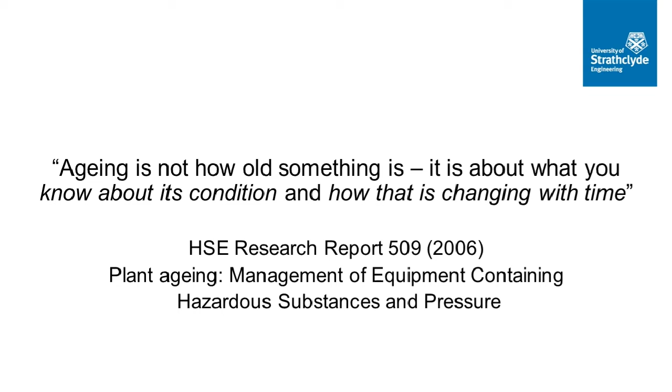It's not how old something is, it's about its condition, and also how that condition is changing with time. There's a dynamic element in it, as well as where you are at this moment. When we talk about aging, it's really relating to the condition of the equipment and any damage, degradation, or defects it may have sustained.

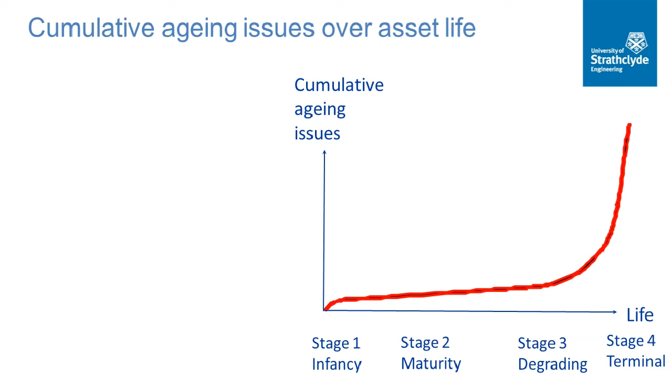So this graph here is the bathtub curve, except I've plotted it in a cumulative way. One of the things that 509 introduced was this way of looking at plant life in 4 stages. It divides aging into 4 stages. Stage 1 is when equipment has just entered service, where there can be some early operational issues - design and manufacturing faults, commissioning faults, first startup kind of issues where maybe flanges are leaking, maybe things haven't quite been optimized. But after a while these things are corrected, and there's then a fairly long stage of what we call maturity, where the equipment is behaving as expected.

There's minimal amounts of degradation. It has high reliability and availability. During this time, any inspections that are done are largely confirmatory of the design assumptions, and there can be quite long intervals between them.

By stage 3 - and there's no scale on this life scale, I don't know when stage 3 kicks in, it's something particular to each piece of equipment and plant - we start to see aging issues accelerate, both in number and severity. I'm having my ensuite refitted at the moment, and it's after 20 years, and it's amazing what there is to find when we've taken it apart. You really don't want to know about it.

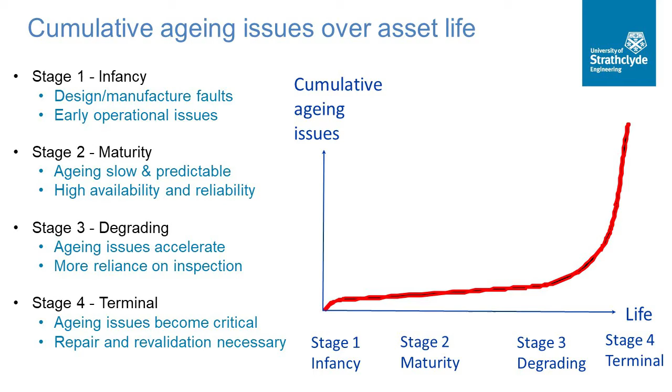At this stage, there needs to be rather more emphasis on inspection and actually measuring and quantifying how much degradation has taken place. So there's quite a rapid change there. The final stage is where these issues become critical. The leak at the bottom between my shower tray and the tiles became unacceptable, and I was forced to do something - I couldn't patch it up anymore, and in the end it needed a completely new refit. So that was an example of the issues over life.

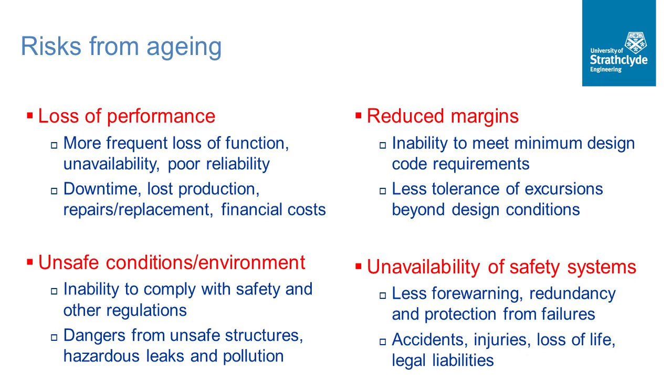We know what the risks are from aging - I don't really need to go through this in any great detail. There's loss of performance, unsafe conditions and environment, inability to comply with safety and other regulations, reduced margins, and unavailability of safety systems. At worst, we've seen the kind of incidents that we saw at the beginning. So there are obviously risks and consequences from aging in relation to performance, safety, the resilience of the plant to tolerate other events and excursions, and dangers from leaks and pollution, and worse.

So what's to be done? Well - risk-based inspection.

I recall this has been around for over 30 years now, for most of my career. I've given a definition: the planning of inspection frequency, coverage, method, and qualification relating to how it is applied, based on a risk analysis of likelihood and consequences of foreseen threats to integrity. It's a fairly general definition, but the key words there are risk analysis and foreseen threats.

You do your very best in a risk analysis to see all the possibilities, but no matter how good you are, there are always events and things that happen that are off your radar. I don't think we should forget that the incredible often happens, or occasionally happens, perhaps not often.

Because the practice has evolved over 30 years following the Health and Safety at Work Act, the Pressure Systems Safety Regulations came in 2000, COMAH and other regulations, and this shifted the responsibility very much onto the shoulders of the duty holders and the competent persons that support them, and it enabled duty holders to change from time-based inspections to a more informed, data-driven process.

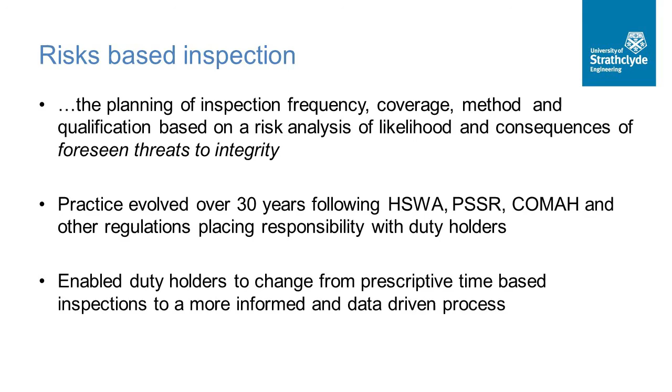So that was risk-based inspection. Now, risk-based inspection has both benefits and limitations.

On the plus side, I think everybody would agree that the greater analysis, the risk analysis, has enabled run times to be extended, particularly in the early and mid stages, those stage 1, stage 2, particularly stage 2 of equipment life. And this has given greater confidence in the plant condition and rate of aging.

There's been increased understanding about the degradation mechanisms, and with that, a reduction in the need to open and enter vessels for invasive inspections. There's what's called clean, non-corrosive service, which when it can be justified, enables a non-invasive approach. But there are also some negatives from it, and I think we should bear these in mind as well.

It's expensive to set up, and it's quite manpower intensive. It's highly dependent on the amount of information that you know about the process conditions, the product, the operating cycles. There's a high reliance on that risk analysis and the data and the reliability of that data.

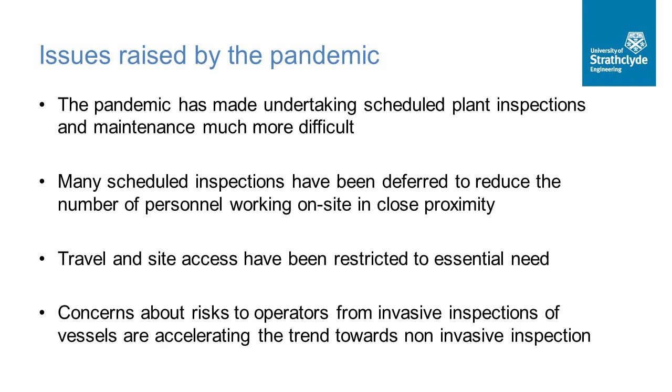And then there are concerns about the risks to operators from invasive inspection, being inside a tank or a vessel in a very confined atmosphere. I think this has been felt to be undesirable during this time of pandemic, and it's accelerated the trend towards non-invasive inspection.

You've got to ask yourself, well, what are the advantages? Why change from invasive inspections? What's wrong with them? There's quite a few advantages. They provide, opening equipment - you can get in there and actually see what's going on, direct visual access.

Inspection methods - you can apply magnetic particle testing to search for internal cracks, which you can't do from the outside, and it allows really accurate locating of where there may be defects or damage on the inside surface, because you're actually there. And I think there's no doubt about it, when you can see things directly, it does reduce uncertainty about those unforeseen damage mechanisms.

Now, there are some disadvantages from invasive inspections. Certainly they're expensive when you undertake them, expensive to prepare, and you have to take your plant down and empty it. There's confined space hazards - it's difficult and not nice work for operators.

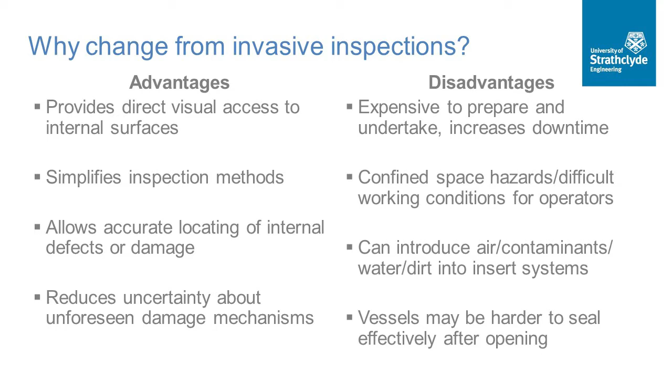There's some distortion that may well have taken place during service, which might make it more difficult to seal. So there are some significant disadvantages, and the increase in downtime and the confined space hazards are really the key ones.

In 2009, I was asked by the HSE, Pauline Hughes, to prepare a report on internal examination. Companies operating equipment with clean, non-corrosive service were claiming very long inspection intervals between opening them up, and the HSE said, well, was this all right?

The result of this was HSE Research Report 729, and you can still get it on the HSE website. It was based on practice and interviews with leading companies. We visited two ethylene manufacturers, one pharmaceuticals manufacturer, and three refineries. We also talked to competent person organisations, IMechE, and the HSE themselves to get their views.

This report examines when intervals between internal examinations, that's invasive examinations, can be extended for vessels. And the key words there are clean, non-corrosive products. Within it, there's a process for establishing when non-invasive inspections can be justified and when internal examinations may be required.

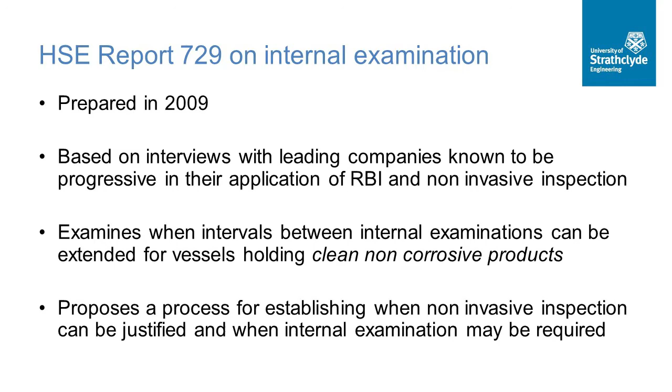I threw this one in because it's always helpful to remind ourselves, when we open a vessel or when we're doing our risk-based inspection, what are the main causes of internal defects and damage we really need to have in mind. The first one is internal corrosion, whether it's wall thinning or pits. It could be hydrogen damage as a result of corrosion.

It may all depend on the combination of the product with the vessel or tank material or any lining. It can result from level changes, and it may not be the product itself, but some contaminants within it, or ingress of water or oxygen, or a mixture of both, or the space above the product that causes this.

Breakdown of protective coatings - many vessels are internally lined, and that is a key aspect of their integrity. Internal fixtures and things might have become loose as a result of vibration.

I've met situations where fluid impingement from jets coming into vessels through nozzles has resulted in wall thinning on the far wall, where the fluid hits the wall and erodes the material. Fatigue cracking from the roots of seam welds.

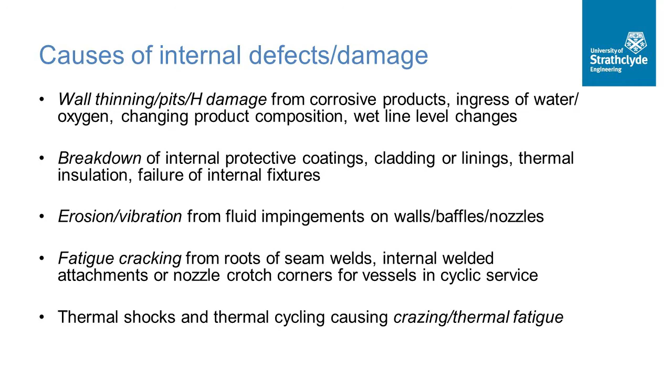The report asks the user to think about these questions in order to justify extending intervals between invasive inspections or reverting to non-invasive inspection. First of all, is there strong evidence - using that phrase, strong evidence - to demonstrate no active internal degradation, particularly for vessels holding clean and non-corrosive products?

I think the whole thing turns around the extent of the evidence that can be put forward from technical knowledge and other things. Does a non-invasive inspection provide an equal level of confidence to that which is invasive? Would it be disproportionate to open the vessel and enter it under ALARP?

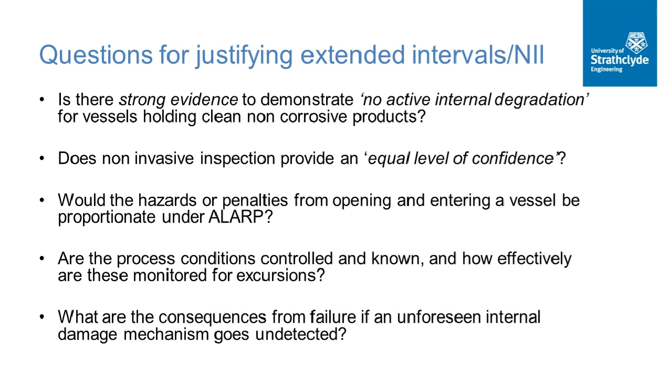How well are the process conditions known and controlled? Do you actually know what is inside your vessel at all times? And finally, what are the consequences if an unforeseen internal degradation mechanism goes undetected? So those are the five challenge questions that we recommended users should ask themselves.

So what is good evidence? First of all, evidence from the original design, manufacturing, and fabrication. What was the quality of the original vessel? Has there been any damage detected in any previous examinations - maybe some remote visual examinations using endoscopes, or vessels in equivalent service that have been examined after removal?

Technical analysis, understanding of the chemistry, and the elimination of corrosion, the elimination of significant fatigue. Having controlled and stable operating conditions, monitoring of cycles - is there sufficient confidence as to what the process conditions are, the temperatures and so on?

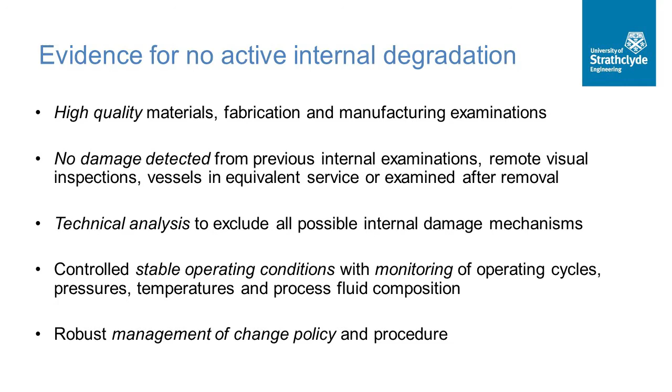And finally, lots of things go wrong when there is change, and I think a robust management of change policy and procedure is also probably a requisite for moving away from internal examinations. So this is the kind of evidence that the report recommends.

There will, of course, be times when it will be necessary to open equipment up - when you haven't got sufficient evidence, when it's weak or there is significant uncertainty from non-invasive methods, particularly if there's some indication from the outside surface of something going on inside, where there's been significant modification or an excursion outside the original specified design pressure or process conditions. Maybe something's got into the process fluid.

Of course, vessels are opened up for other reasons, to change catalysts, new linings and things. And on these occasions, it's appropriate to actually go and have a look, do some internal inspection.

And finally, there's a category of vessels, particularly in the nuclear industry, where the consequences of failure are so high that the very low probability of unforeseen threats becomes relevant. I think you'll find in the nuclear industry, certainly amongst the nuclear regulators, there is a fair bit of resistance against relying entirely on non-invasive inspections.

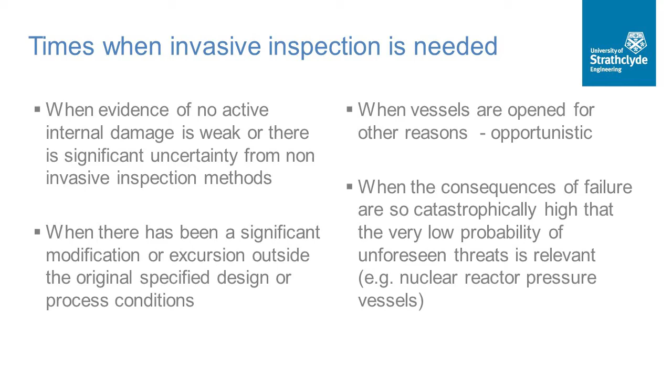So I'm going to finish in a moment. Next slide, please, Emma.

So this pandemic, I think it's been a challenge, but it's also, I feel, an opportunity - an opportunity for making changes to the way we do things that will ultimately be beneficial. Any moves towards non-invasive inspections and to replace invasive ones, providing they can be justified in the way I've just described, could well be a benefit that we can take with us into the future.

But there are a number of questions that I'm looking to David Burgess, who's speaking after me, to try and answer. How can non-invasive inspections provide an equal level of confidence, particularly if they're used repeatedly and over the longer term? Do we have enough confidence in the methods that are available, and what new methods are coming online?

So I think the answer is technology. How can more sophisticated online plant data about the conditions and the loading cycles be obtained, and how would these be used for inspection planning?

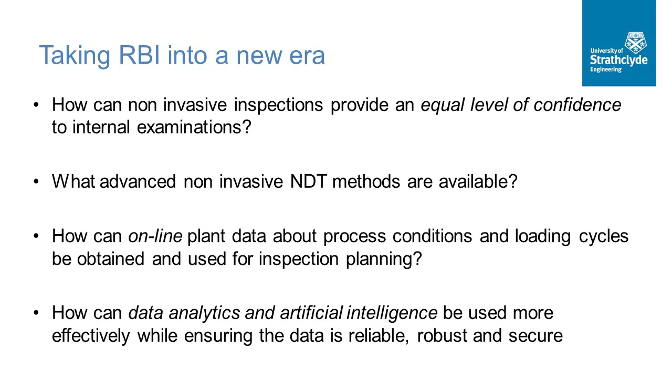So next slide, please. And I've reached my conclusion. With this introduction, I'd like to say that RBI is routinely used now for managing the risks from aging, but the pandemic is prompting companies to defer internal examinations. I think we'll come back to that - that's my reading of the tea leaves, but we'll come back to the poll in a moment.

The trend towards extending run lengths is between internal examinations and using non-invasive inspection. It needs to be backed by strong evidence of no active degradation. And we've got to ask ourselves, is my evidence strong enough to justify this? What are all the factors under those headings that I showed earlier?

And finally, I think the use of technology in terms of non-invasive NDT technology, plant monitoring methods, and technology for analyzing databases will in future provide an opportunity for better decisions to manage the risk and to lower the costs.

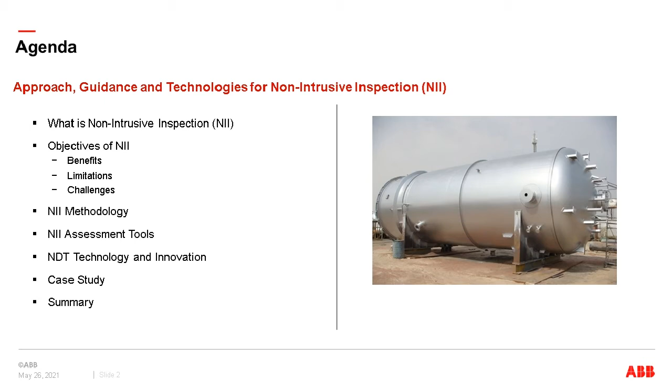Okay, so what is NII? Well, John touched on it really. We have high hazard bits of kit on our sites, stored pressure energy, quite often flammable, corrosive hazards inside. And as a result, our UK regulations and other regulations around the world make it such that we have to undergo statutory periodic inspection, and quite often that does involve non-destructive testing as well. Historically that's been internal visual inspection, but as John mentioned, non-intrusive inspection has appeared over time, and methodology has developed, and quite significantly there's been later methodology recently in the last year or so, so it's a good time to talk about the latest methodology.

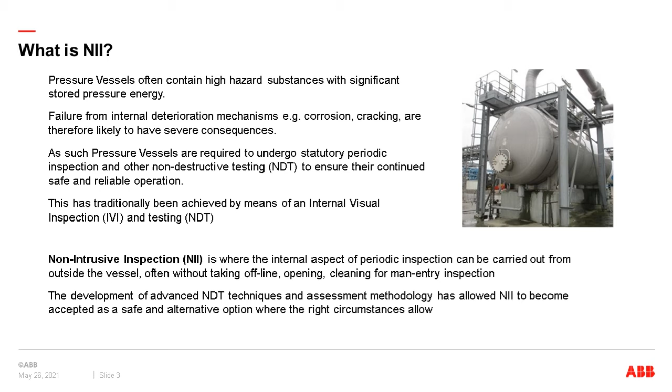Now, NII can be with the equipment online or offline, so it might mean that it needs to be offline because it's hot and difficult to approach, but you still might not need to go in it invasively. So that's the point there.

I think it's important first of all to understand why you want to do NII. What is your objective? And that can make a difference with your approach to the assessment and how you then approach the inspection. Some people might want to do it to save money, but really the main points of NII are certainly above that. It's about, if you've got equipment and you've got a large event and you want to understand the condition of equipment because you might anticipate repair, then it's useful to do that before the event so you can identify any repairs up front in anticipation for a shutdown. It might be that you have so many items in the shutdown that the shutdown would be unreasonably long, so you might choose suitable candidate vessels to do NII on, providing it's safe to do so.

It might be that you've got deferment, postponement of a vessel coming up. Again, you don't have enough information or confidence in postponing it for the period you might want to, so NII is quite a useful process to help support a postponement.

Another one might be to complement an internal inspection regime, so between the invasive inspections you'd like to do some NDT, and in a way that can be termed NII as well. And also, if you have upset conditions, maybe a pH excursion, that can also warrant you to say maybe not shut the plant down, but let's do some NII to see what the effect is of that excursion. Any of that, however, really should be defined such that the risk levels are not increased. This effectively means there should not be an increase in the probability of failure when you introduce NII.

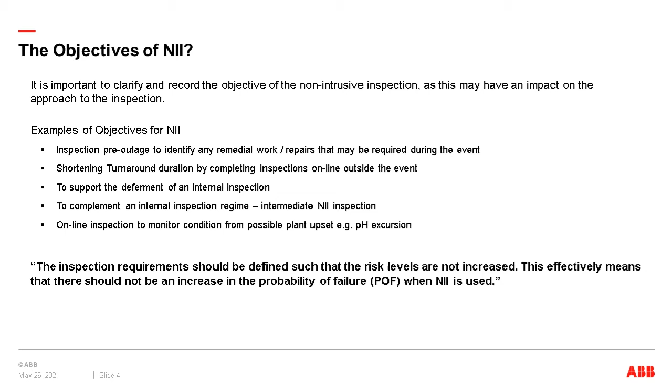Okay, so thinking about the benefits of NII, I touched on it before. There's an obvious one, cost saving - you don't have to open up, isolate, prepare, clean, and all of that. Obviously that will also give you increased plant uptime in not having to bring the plant off in certain circumstances. One other good reason that's cited is confined space entry, people going into vessels - the hierarchy of avoid and remove the risk. But you've got to balance that risk, making sure that if you're doing NII, you've not made the risk higher.

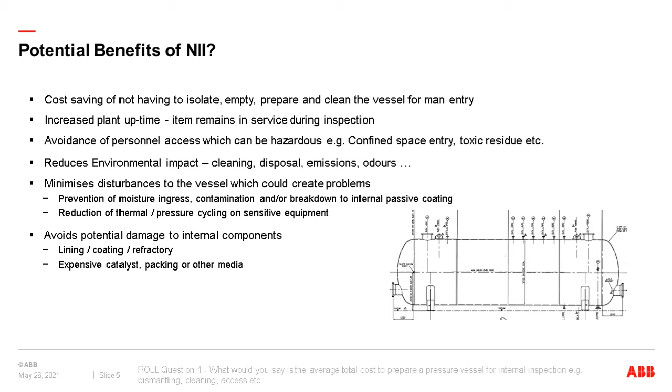You can reduce environmental impacts, the cleaning and disposal of emissions and odours - that can be an effect. But also some vessels might not benefit from disturbances, pressure, temperature cycles, so it might be advantageous to keep the equipment in service as much as possible to avoid any form of disturbance. And also it can avoid damage to internal components - you might have expensive catalysts in there, coating, refractory lining, so again that might be a benefit of NII. So there are plenty of benefits there.

Limitations. What would stop you doing NII? Well, if you don't understand the operating regime and there's potential for corrosion and deterioration, then you really shouldn't be going in that direction. If you don't understand the damage mechanisms, if they're unpredictable, again it's probably not a good idea to do NII.

If you have high degradation rates, high corrosion rates, again perhaps not a candidate for non-intrusive inspection. If you don't have sufficient inspection history or items of similar duty, then it's quite difficult to predict the damage mechanisms that are likely to occur and hence how you're going to monitor those. So again, maybe not a candidate.

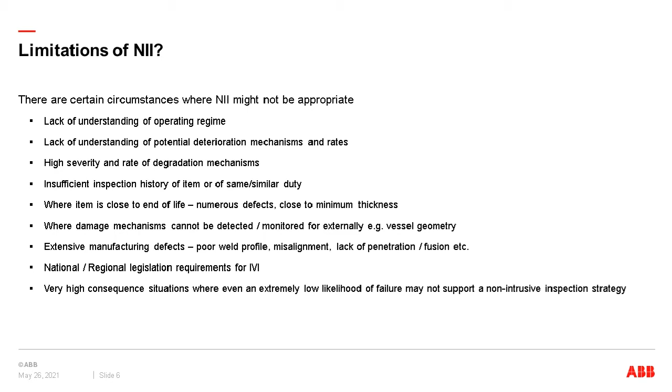Where the item is close to end of life, John talked about that in his asset life curve there, then again can be unpredictable, so maybe not a candidate there. And where damage mechanisms can't be detected, or maybe there's extensive defects, manufacturing defects, or the obvious ones like national regulations might not allow it in certain countries. And the final one, I think also very important, is where there's such a high consequence of failure, then maybe that's too much of a risk, so invasive inspection is the way you need to go.

There has been some reluctance to NII. Really, traditional culture was invasive inspection, and it has taken a while for people to accept and adopt that.

Some items are not suitable. It's very hard to inspect key aspects because of their certain design. Sometimes, quite often, you turn around and something's open for cleaning anyway. So if it's open for cleaning, then why wouldn't you do an invasive inspection? Or again, if you're not sure about the damage mechanisms, then you need to have some confidence in that.

It might be that there are some corporate rules within the organisation where they're not prepared to accept a potentially higher risk. So they might say, well, we don't want to adopt that. And sometimes, to support non-invasive inspection, it does involve quite a bit of technical assessment and NDT, and it might be that the cost of that outweighs the benefit of what you're looking for there.

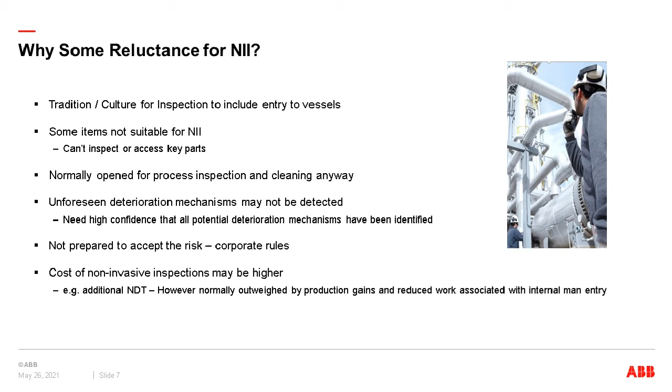So on to the methodology. The accepted methodology, certainly in the UK, but I think around the world, is this one originally introduced in 2007, DNV RP-G103. That's been developed over the years, and the latest version was introduced in 2020, and that now provides a more quantitative approach. It's a five-stage approach, and you can see the diagram on the right there for that.

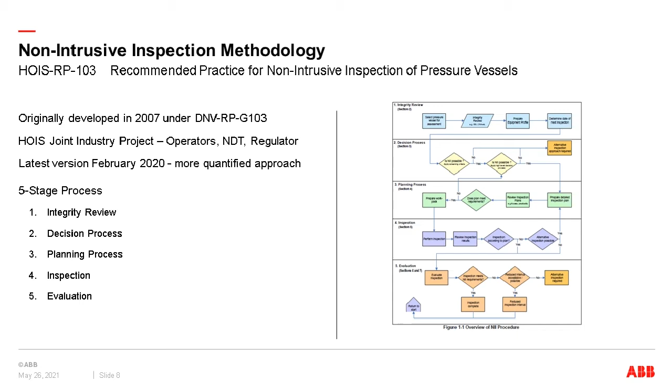It involves an integrity review, then your decision process, then a planning process, then actually doing the inspection, and then evaluating and assessing the inspection results on the back of that.

Looking at the integrity review, what you need to do is gather all the information about the equipment. What's its history? Has it got damage already? An RBI approach is quite good - if you've already got an RBI, that provides a lot of that information.

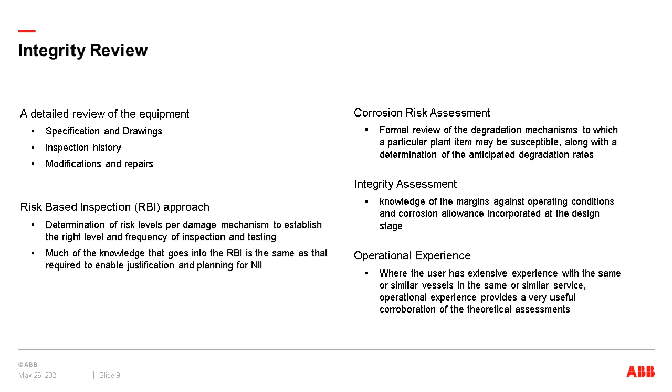The very important thing is to do the corrosion and risk assessment, identify the damage mechanisms, and then, of course, you need to understand its operational regime and its operational experience, such that you can understand what might be the damage mechanisms that are likely to occur. So that's your integrity review.

And then what you do is you go into this decision process, which is a two-stage process. The first part is screening, and you use the flow chart on the right to ask yourself the questions: is the vessel intrinsically suitable for non-invasive? That means if it's got damage mechanisms, you would want to use NDT to measure from the outside. And if the construction of the vessel won't allow that, then it's not intrinsically suitable.

Has the vessel previously been inspected before, and is that still relevant? Or is there any other equipment on the same duty you can take credit for? If you haven't got any of that, then it's very hard to make the case for an NII. Is there operating history relevant? Do you understand that, and is that reliable? And then finally, if entry is scheduled for another reason, then that might say, well, do the inspection anyway.

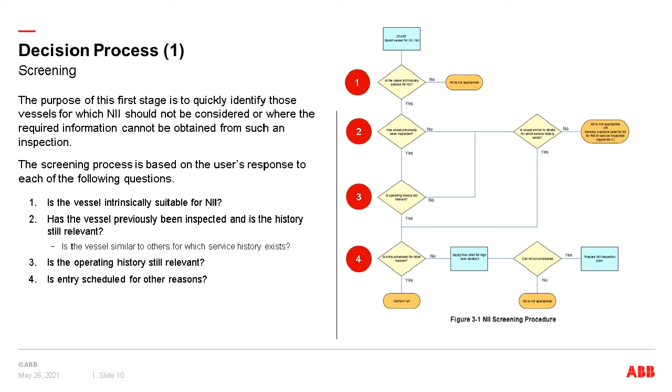So if after that assessment it's saying NII is acceptable, then you go on to this other decision flow chart that asks for three questions.

What is your confidence and ability to predict the type and locations of degradation? Because of course what you're going to be doing is an inspection from the outside, so you need to know what type of degradation to look for and where to look for it.

That's very important. Then, what was your previous inspection's effectiveness? When you've looked at it before, did you look thoroughly? Did you understand what the damage mechanisms were and where they were? If you didn't have a good, reliable inspection previously, that's going to make it difficult to justify the NII. And then the severity and rate of degradation.

If that's high, again that might affect the decision. But if all of those are acceptable against that chart, then it allows you to go forward and do an inspection plan for non-intrusive inspection.

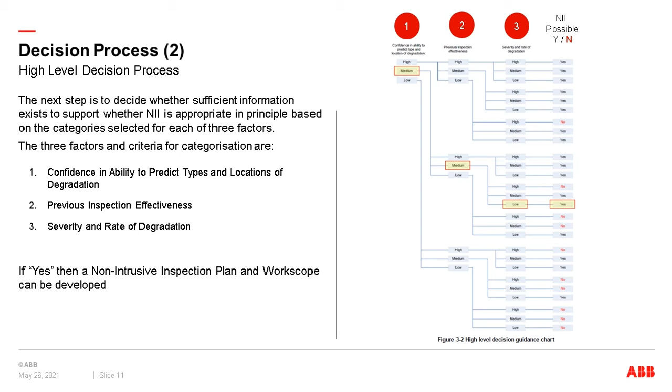That will be based on many things like the consequence of failure, the probability of detection, the confidence to predict the locations. Within the guide there are many tables that you put figures into, and that will essentially give you the locations and coverage required for the inspection.

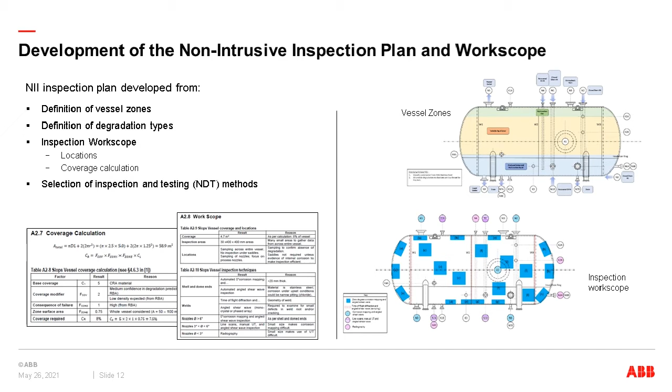And then you will select the inspection testing methods for that, again with the guidance within 103. So that's the assessment.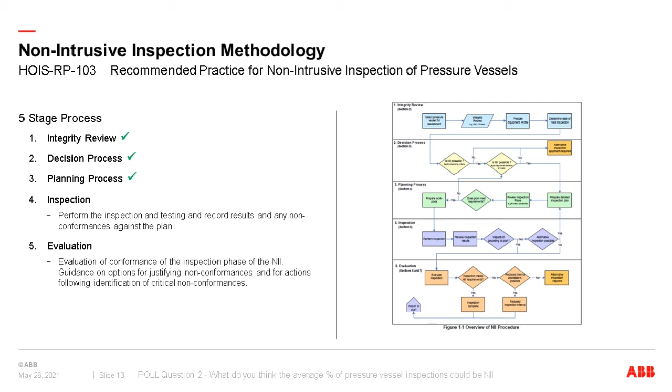So you've now got the assessment plan if it's okay for non-invasive inspection. The next bit, item 4, is to do the inspection and make sure that it's done as per the plan. Then after the inspection, evaluate the results, because it doesn't always go to plan. You might not get the coverage you want, you might not get the results that you expect. So there's that final part of the evaluation to say, well, have we got enough information to be acceptable? Okay, so that's in a way your methodology.

On to now some assessment tools.

Some organisations are now starting to offer software tools, quite good. There's a 3D model where you can actually display, it helps you visualise the corrosion zones and overlay the NDT results on it. You can see the image on the right, and it guides you through the assessment process. Look out for those if you want to use them, and it manages all the information. There's lots of data as well, which it helps you manage.

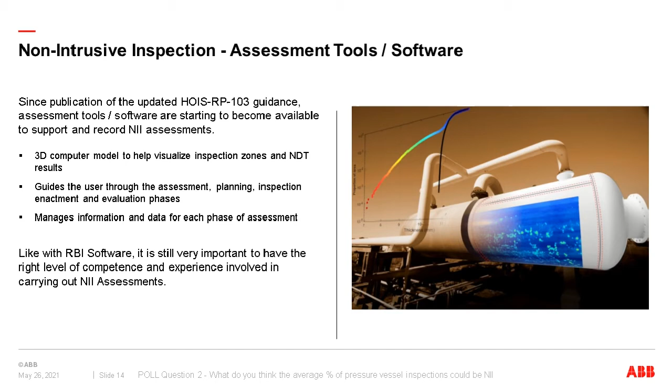But it's like RBI software, rubbish in, rubbish out. You do have to have competent and experienced people doing the assessments. It's not just about the software tool.

A slide here about challenges of adoption. Really, the point of this is that the latest methodology is relatively new. There has been non-invasive inspection informally before the methodology came, and it was utilised successfully.

When you do these assessments, that costs time and resource both in the assessment side of it and in the engagement of advanced NDT. So I think we do need to have an understanding of what the expectations are in terms of compliance with the new guidance, because it can be quite comprehensive.

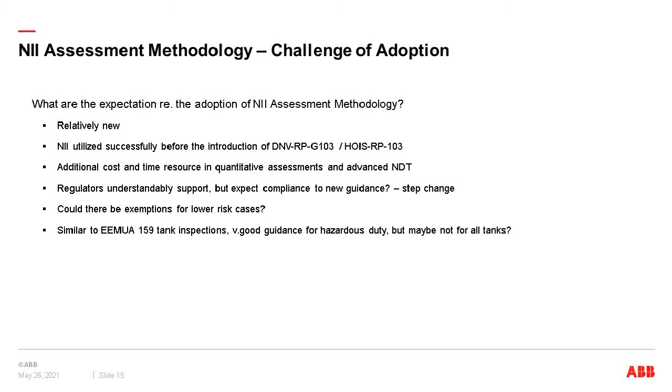It is a bit of a step change. Could there be exemptions for low risk cases? I see it a bit similar - some of you might remember EEMUA 159 tank inspections, very good guidance for hazardous duty and many tanks, but maybe not for all tanks. Is the latest methodology the same?

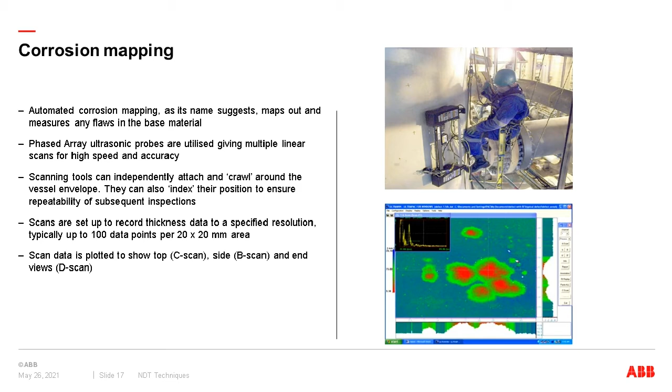This uses ultrasonics phased array, where it gives multiple scans, all automated on a carriage that you can attach to the item, and it will scan, detect and map the thickness and give it to you in a nice display. It's repeatable, so you can compare it with previous inspections. You can work out the corrosion rates and things like that. So corrosion mapping - very good, very reliable, and quite developed now.

Another one, if your equipment's hot, normal UT testing might be around 60-80 degrees as a maximum. But there is special equipment where you can use ultrasonic thickness testing for up to 350 degrees, with special couplant and special transport systems. Again, advancing technology is allowing that to take place.

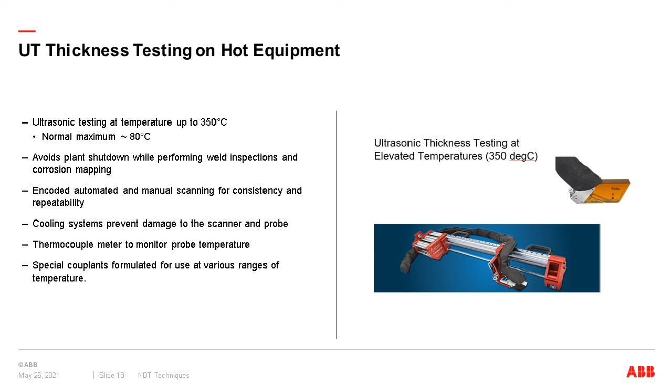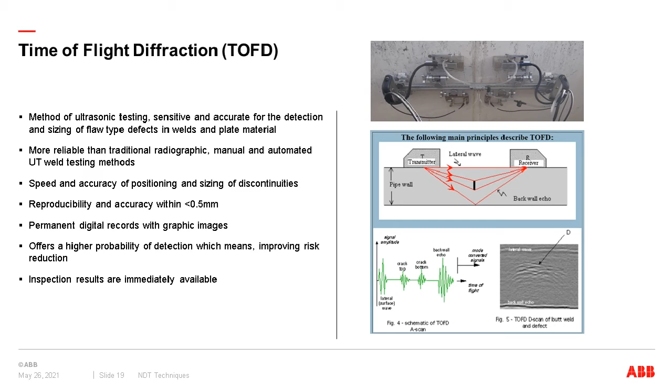Another one would be time of flight diffraction. Again, it's been around for a while now. This will measure thickness, but it's also very good for flaws, crack type defects. It's an ultrasonic method, like a pitch and catch method. You can see the image on the right where one transducer sends it and the other catches it. It's very accurate and reliable in terms of measuring defects. So again, a common one that you might use for non-invasive inspection.

Other digital inspection testing techniques include online monitoring, real-time corrosion and erosion monitoring, wireless UT thickness gauges, and more recently, robotic tank floor inspections. There was an IMechE webinar last week on that, which was very good. So technology is advancing and allowing these non-invasive inspections.

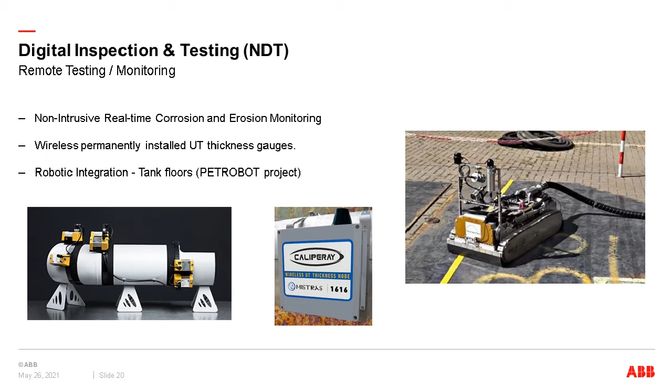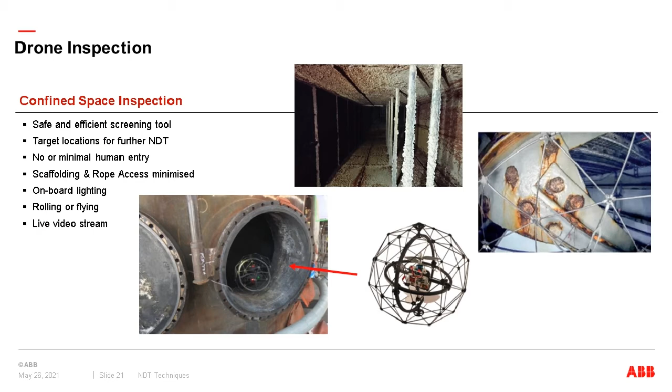And then drones, we've seen those. They're not quantitative, but they're quite good at being able to recognise where there is damage, which then helps you locate it, and you can then perhaps measure that from the outside if you think you can. So again, drones are quite good technology.

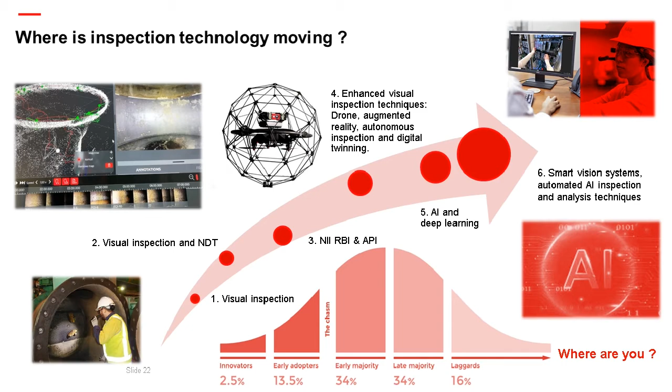Moving on, in terms of technology, it's a moving target. I think we're all seeing that now, it's advancing all the time. You can see there, item one was visual inspection, then inspection and testing, then we did RBI and NII, and now we're moving into these advanced techniques that are helping us give more reliable information. Like John said, these still have to be tested to make sure they are viable and reliable techniques. Like the ones we're seeing now in terms of phased array and time of flight, they take a while to get the confidence, but they develop and we do have the confidence in them ultimately.

A short case study here, with three types of cases: onshore refinery, offshore platforms, and onshore and offshore combined. You can see the percentage of items that might be suitable for NII - remember that screening we talked about earlier. It's surprising actually, once you go through the initial screening, you can get quite high percentages that could be candidates for NII. Some people believe that could be even larger as technology develops.

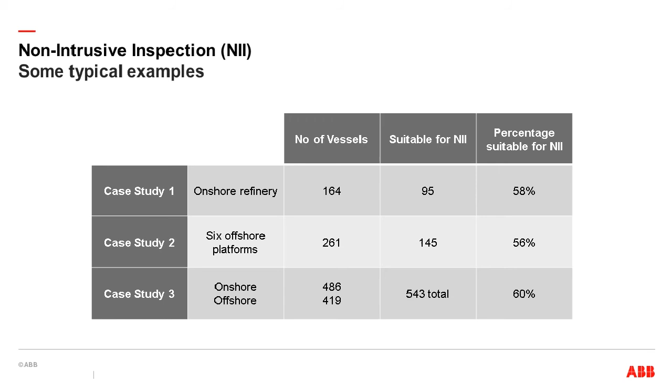So in summary, non-intrusive inspection is becoming increasingly the norm as advancing technology and methodology helps us determine that to be risk acceptable. They must be carried out, though, by competent and experienced people - it's not just about the software or the NDT, there does need to be an element of competence and experience there. In some cases it's just not possible, or not the right thing to do, due to the risk involved. Sometimes it's not possible because national rules and regulations in certain countries won't yet allow that.

Intrusive inspection will still be required if the NII criteria is not met, and I would say for very, very high consequences, you do need an element of invasive inspection to support NII. Okay, so that's the end of my presentation. I'm sorry it was quite quick, but we were aware of time, so I wanted to try and catch up. Okay, thank you all.

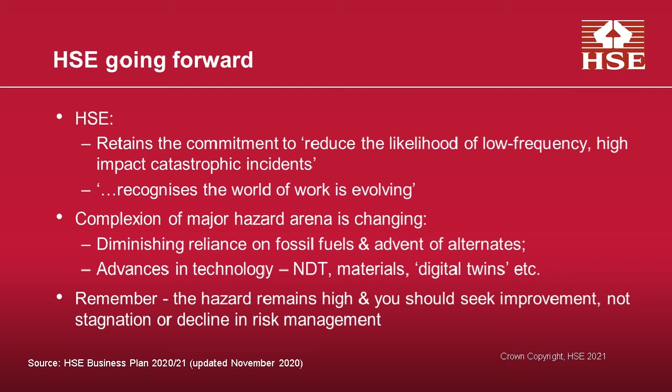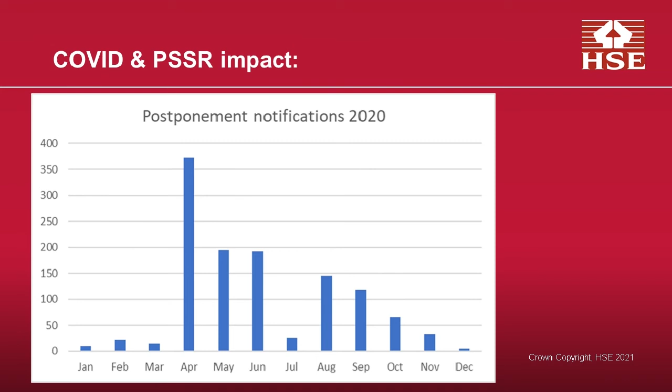So a big chunk of that is not shown - that's non-PSSR equipment. Bear in mind, there's a lot of what some people may term non-statutory equipment, but the law still requires you to inspect it, such as tanks, pipework, etc.

Some sites had postponement in place pre-pandemic already, and that presented something of a challenge. There are a lot of new or relatively new owners in this arena as well, people buying up assets and running them for the first time. They face some unexpected challenges too.

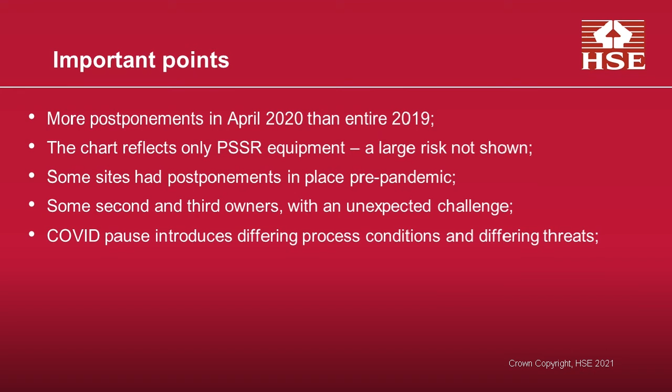It's very important to remember that the COVID pause changed the outlook for lots of people. Some people had inventory that they couldn't move, and so ran at high levels. Some people suffered some stagnation because of that. Some ran empty, some partially decommissioned. So there are lots of differing threats, and they should be taken account of in any integrity assessment.

As has been alluded to already, some have adopted a non-invasive approach, partially to get them over the hump, if you like, for want of a better phrase. But there are changes in maintenance processes as well. And we're a bit nervous about an increase in what I would term temporary repairs, really defined life repairs, clamps, composite wraps, etc. Mindful that those may have increased in popularity as well.

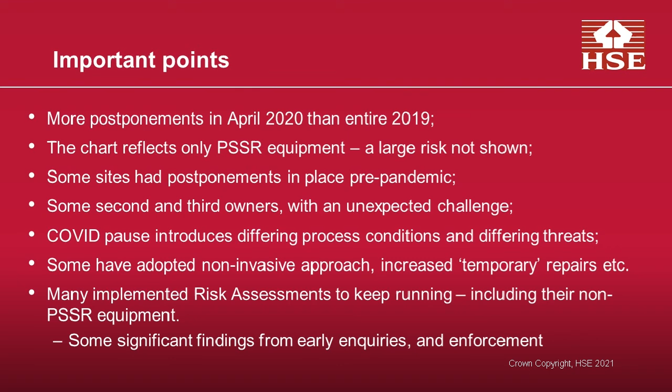In accordance with our suggestions that we put on our website, people have undertaken some risk assessments to keep running, including their non-PSSR equipment. We did have some significant findings from there, and have in some cases resorted to enforcement. So bear in mind, we will do that if necessary.

In terms of how we move on from COVID, we've published a document which suggests that we really want to return to normal. In order to understand the impact, myself and the mechanical engineering colleagues, along with the regulatory colleagues, may well knock on your door, or as part of an intervention if you're part of the COMAH regime, and ask you about the COVID impact, what you were doing before that, what you were doing during that, and how it affected you, what backlog you've left the pandemic scenario with, and how you propose to get back to normal. We'll ask for some numbers around that if we can.

It'll help us understand. One thing I should say about that, the COVID pandemic, bear in mind this may not be the last one. We need a system that's resilient now, that factors all of these issues in, that we gain an insight into how it's impacted, but also what else we can do, what systems we need to build to get around that.

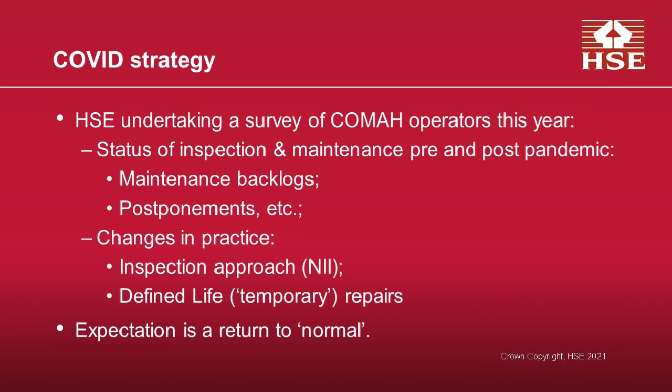One other slight issue I might add, coincident with this, was Brexit. We might not think that's an issue, but things moving in and out of the UK, and especially labour moving in and out of the UK for shutdowns, there's been some hint that may have been a problem as well. So I shall move on quickly and try and cover as much ground as possible.

With respect to non-invasive inspection, a lot has been made in both John's presentation and the ABB presentation before that. The guidance is out there in terms of 103. We've supported that through its development over the years. Colleagues from the offshore energy division supported that. We do have one or two issues with it, but that's the case with any evolving guidance, I guess.

Bear in mind, it is guidance. You don't have to use it. And I think what we should be careful of is that we're outcome driven here, that we have an inspection regime that remains suitable all of the time. I appreciate the issue that it can be quite complex, but it's intended really for high hazard situations.

So to my mind, the complexity and the rigour is appropriate. We shouldn't be entering into this without an understanding and a solid foundation of how your assets stand now. Your RBI schemes should be mature, they should be well managed. You should have a great understanding of the operating conditions of any piece of plant that you want to apply this to. And don't lose sight of what an intrusive visual inspection will gain you, because there's a lot to be said for it.

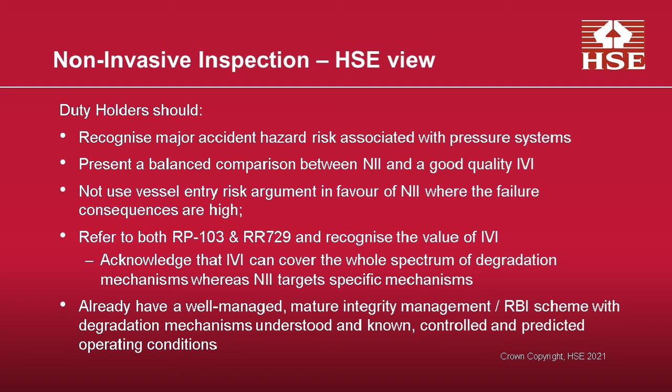There are some issues that I mentioned. My colleagues offshore have issues, for example, around Appendix C, first in-service inspection. As has been mentioned previously, linings, for example, internal geometries can all cause very good reasons for not undertaking or not assuming a non-invasive inspection.

Throughout this, please bear in mind you need to manage the risks to a level as low as reasonably practicable. One of the issues that we do have is this issue of confined space entry. We've had some duty holders come to us and compare the two. Fully appreciate that confined space entry should be avoided if at all possible, we get all of that. But the information gleaned from entering that confined space and intrusive inspection prevents a major accident. We don't agree with the position that we should trade those risks against each other.

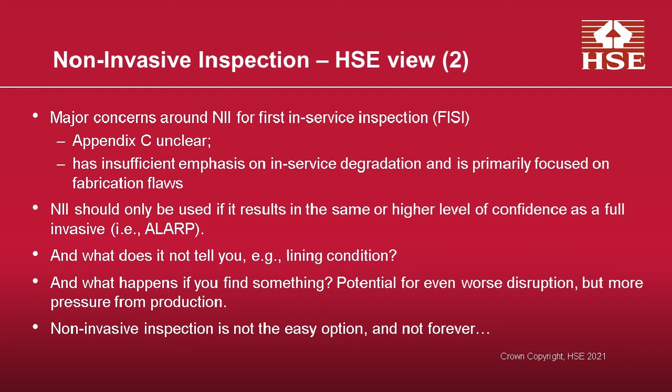The industry has shown over the years that it can manage confined space entry properly, which is very helpful, so please don't lose sight of that and try not to use that argument. I have encountered duty holders who said we want to move lock, stock and barrel to 100% non-invasive inspection moving forward. I don't agree with that in the slightest, and we'll fight that robustly, because even as shown in my ABB presentation, we can't move to 100%. That just doesn't seem practical, certainly not for plants that were never built for a non-invasive regime. Maybe in the future we can get to that position, but I just don't see the population supporting that premise right now.

Moving on to other issues, I'll draw your attention to an instance which has now been through the court, and I'll talk around this for the learning I think which came from it. This was quite a scary instance: 17 tons of ethylene in 2017, a huge gas cloud, and I think this is a piece of learning for us mechanical engineers as well. 17 tons doesn't sound like much, but my word, that's a very large gas cloud.

They tend to be heavier than air. It finds areas of congestion. Thankfully it did not find a source of ignition, but this is a major issue, and you can see that it even led to partial evacuation as well.

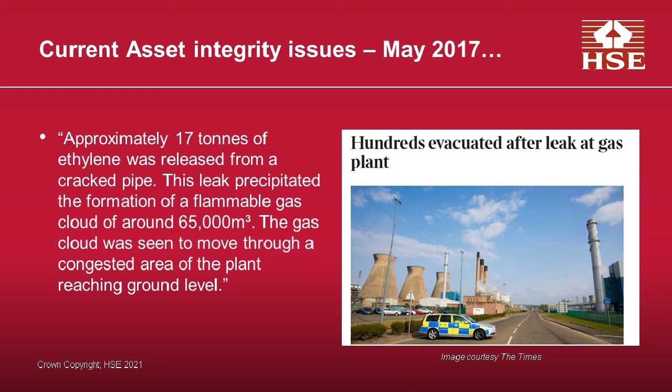In terms of the failure, and I can talk around this now because we've been through the court system, this is external chloride-induced stress corrosion cracking. The RBI failed to anticipate that and failed to recognise the full range of process temperatures, and hence it failed to recognise that this line could see significant periods of running at 80 degrees C. Very active chloride stress corrosion cracking there.

In terms of the source of the chloride, it's probably worth talking around that as well. This came from atmospheric chlorides as far as we're concerned. This is a coastal environment. It didn't leach from the insulation as far as we know. So bear all that in mind too, that your plant can be under threat from something as simple as humidity from a coastal environment.

The other thing I'd like to point out is the failure mode. This is not a small leak. This is a CUI failure that didn't result in a pinhole leak. A pinhole leak is bad enough, and we would pursue you for that anyway, but this is a catastrophic failure. We've seen this previously where damage coalesces in certain geometries and we end up with complete rupture.

We've seen a lot of assessments which suggest that, for example, CUI, this can't happen. Well, I think that it can actually, and we've seen this on a number of occasions. I recall going back to 2005, I believe, the Coryton refinery, long since gone, CUI failure there - instantly tens of tons lost and a fire that could be seen from Westminster. That was not a pinhole leak. So don't lose sight of the damage mechanisms and what might happen. Catastrophe is potentially just around the corner.

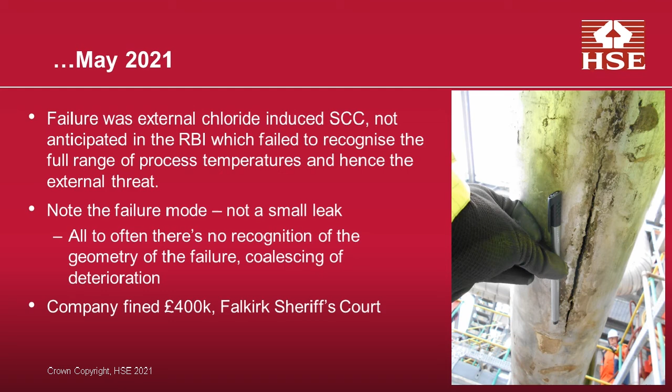One, I'm not going to touch on greatly, two instances actually, but I want to put something out there because there's significant learning here for operators who use NDT companies and third parties to come in and do some work for them. Firstly is an instance of radiograph duplication. This is on a significant scale. It's not one of the major hazard sites, but we have an interest in NDT and have pursued this.

And it was a diligent third party that found this. The one thing I will say is we haven't had a hint at this before, aside from a case in 2013 written to one of the NDT companies. This newer one is on an altogether bigger scale and is somewhat driven by various different motives. What I will say is if you're an operator or an end user of NDT companies, we put a lot of stock in the rigor and honesty of NDT, and I think we all go to bed at night thinking that what we've seen is actually accurate. This instance showed to me that that might not well be the case, and you can be cheated.

In terms of radiography, we were lucky in that somebody found it. We were also lucky that there's evidence left behind. Someone undertaking UT, MPI, or whatever it may be, they could readily cheat.

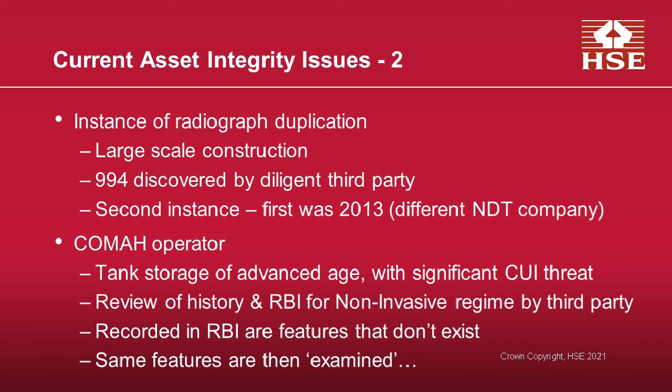We have some significant issues plainly with that third party, and we'll be taking that up with them, to say the least. So I'll not say too much more about those because those are ongoing.

As has previously been said, in all of these systems, we undertake RBI, undertake non-invasive, built on the top of RBI, and then perhaps move to a digital twin. It's all going to be meaningless if we put garbage into that system. We have to have a robust foundation for any of these inspection regimes that we undertake.

We've seen a lot of instances where things like RBI lead to a lesser inspection, and companies are selling on that basis. Non-invasive inspection means that you can save a lot of money. Okay, that may be the case. But please don't enter into a dialogue about non-invasive inspection thinking that's what you're going to alight on. It might not be appropriate for you. Don't enter into these regimes with a predetermined outcome, because that's just downright dangerous.

And out of all of this, we really, really need some intelligent customers at the end of it, able to interrogate and push back against poor assumptions. And the independence, as I pointed to in these cases, the independence and rigor is absolutely vital.

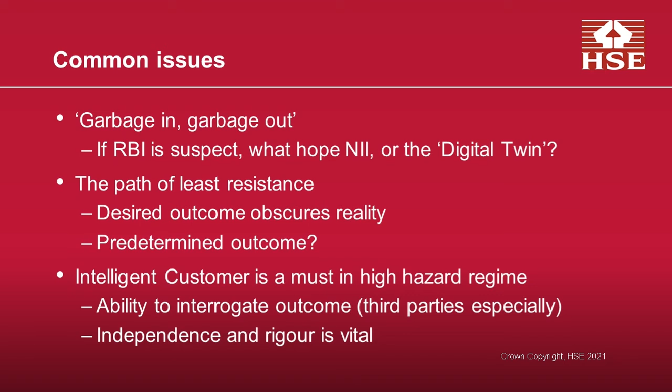Given that this was an IMechE webinar, I thought it appropriate to point to the IMechE Code of Conduct with respect to how we all behave in these instances, and we have to be honest with each other. Even potentially contravening regulation by act of omission would contradict the Code of Conduct. It's important that we're honest and rigorous in our job, and I thought I would point to that.

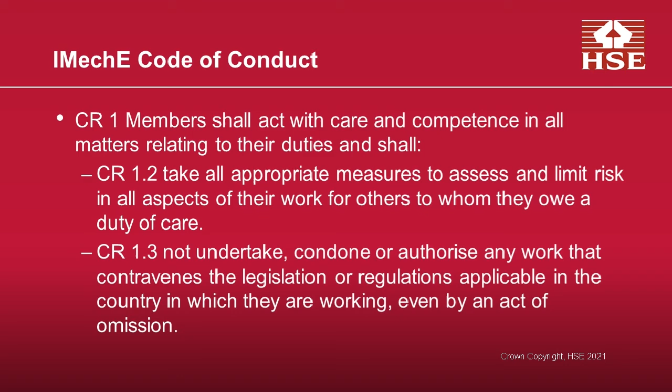In terms of the law, we can indeed pursue companies and individuals if we have to, if we find this kind of thing. So bear in mind that people undertaking inspections for somebody else, you do have a duty of care under the Health and Safety at Work Act. But it's also notable that if someone intentionally makes a false entry, if you falsely make an NDT report, potentially you are at risk. That's an offence under the Health and Safety at Work Act too. So that applies to lots of different people.

I've battered through that in a raging hurry, mindful of the time. I hope it was informative. I hope I've at least touched on some of the questions that went before, and I'll hand back to Alan.